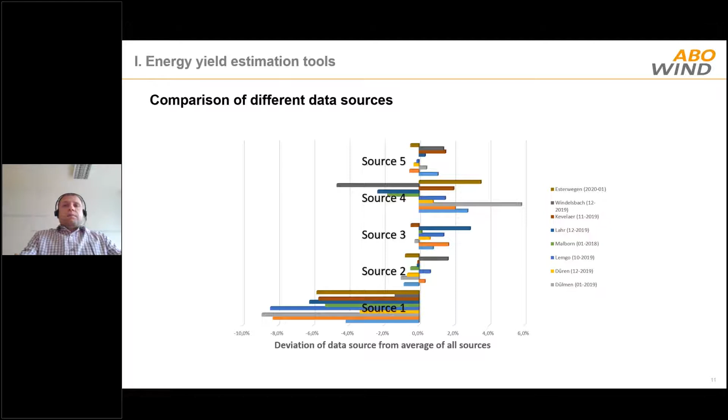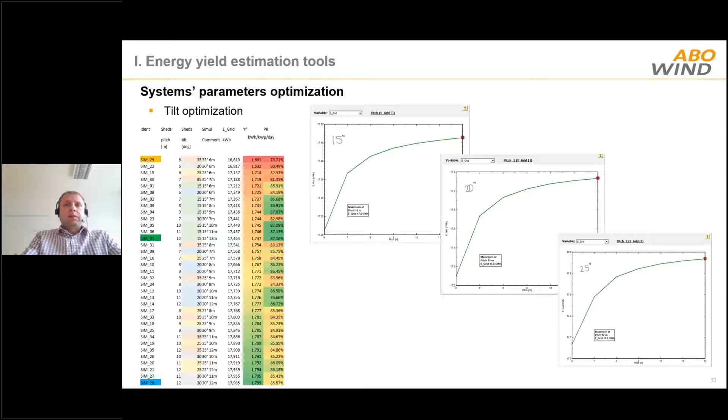The tilt optimization, of course, is the other factor, immediately going together with the optimization of the pitch. Nowadays, it is a really convenient and suitable way to run multiple simulations to get the optimum parameters for these criteria.

A comparison of different orientations and also module technologies is shown in the table here. Of course, depending on the location of the site, it is always worth evaluating the best orientation of the system. Nowadays, with the support of the software, it is a really quick process, but again requiring an experienced person running the software simulations; otherwise it would take much more time to get a better understanding about the optimum

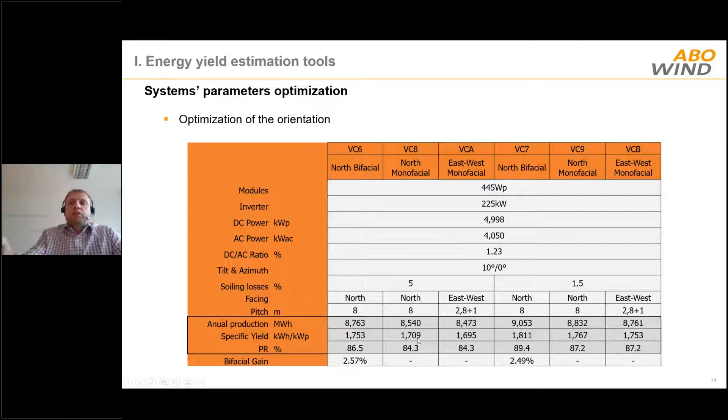yield. Of course, in recent years, bifacial modules are becoming more and more widespread on the market. So assessment of the bifacial gain compared to the traditional monofacial estimation is also part of the optimization that we perform when deciding whether to go ahead with a project or not.

Another important parameter that is part of the system assessment and parameter optimization is the DC-AC ratio. Here, of course, you can see different variants of the DC-AC ratio for the same project and how it affects the total yield and the performance ratio of the system. This helps us make a decision on the best DC-AC ratio, but also, working together with finance, to define the cost for obtaining the best DC-AC ratio compared to the expected yield.

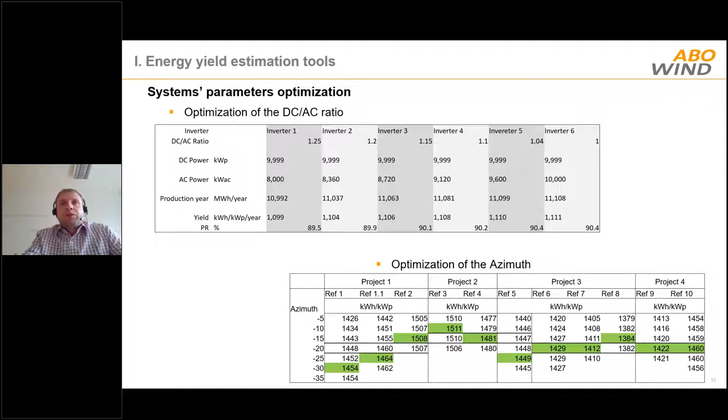Again, depending on the system location and the near shading objects, there could also be optimization of the azimuth required. In the example here, you can see 4 different projects where we ran optimization of the azimuth, and the results at first look could be a bit surprising, but it really shows how 4 different projects in relatively close locations can have a different optimum azimuth exactly because of the near shading objects. And this is a very important step for us because we are always targeting to get the maximum from the system.

After the meteorological data, the next criterion, which is of key importance for the projects that we are developing, is of course the site conditions. On the next 2 slides, I will show you how it goes when evaluating the site conditions with respect to the topography. Depending on the racking system that is going to be used, the terrain slope limitations are defined. And by using a proper software tool, we can relatively easily and quickly define the exclusion zones, shown here in red color within the site boundaries.

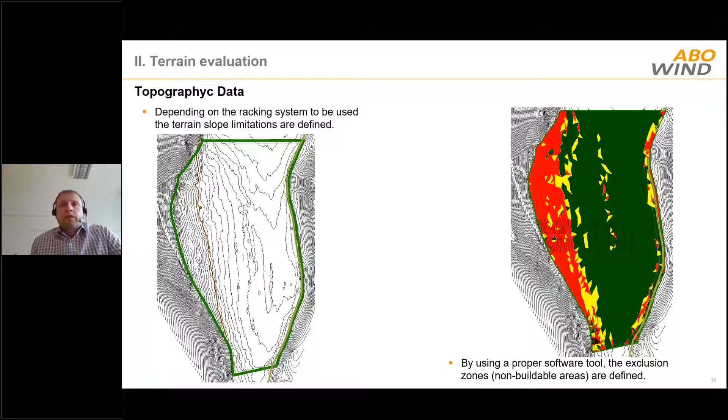After this, we are able to create a preliminary layout of the system, again identifying the exclusion zones, so we can easily understand how much power we can install on the current location, taking into consideration the zones of the terrain that are not proper for installation of PV systems.

layout. Here is a quick site impression for a relatively complex terrain, how it looks when built. Again, the same project. What is important to mention here is that the terrain is changing its elevation in all directions. But anyway, the fixed tilt system is following the topography of the terrain. And even in this project with the different slopes, which were higher than 10%, to overcome this problem we used 15 different table configurations, which is also important for the economics of the project, of course.

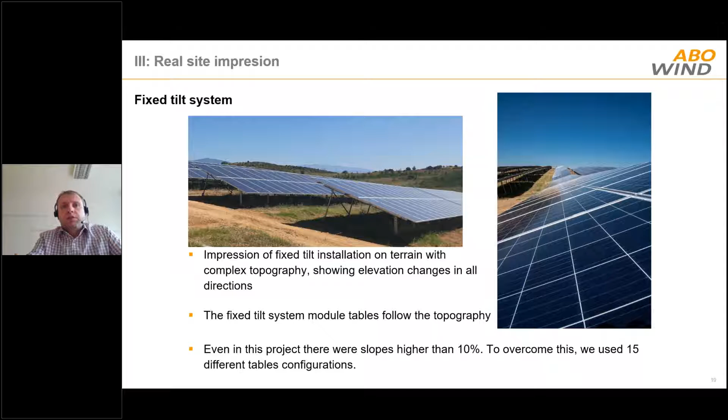Some brief and important conclusions out of this: I would say that using a proper software tool in combination with skilled and experienced people significantly increases the speed and the accuracy of the preliminary site assessment and design optimization. This gives us the opportunity to run multiple simulations in order to come to the solution that we consider optimum for our project.

The meteorological data that is used for the yield estimation is of course of crucial importance, as I was mentioning in the beginning, because wrong assumptions about this can kill a profitable project in the beginning, or vice versa, give a green light to a non-profitable one.

And of course, accurate topography is also of essential importance for the initial assessment of the project site. Again, for the same reasons, if improper topography or a wrong estimation is used, it can bring wrong conclusions, positive or negative, and of course, a negative output for the company itself.

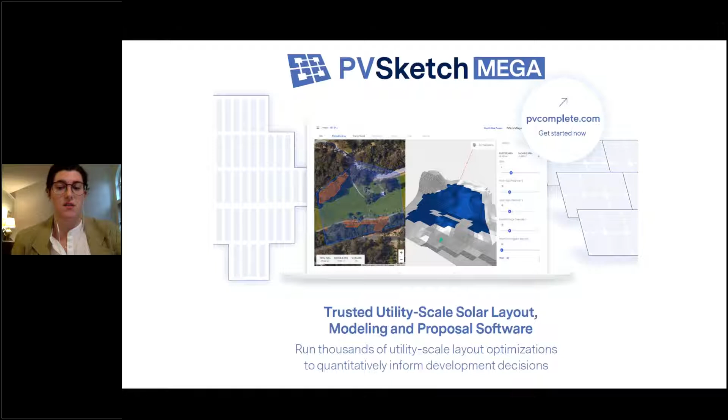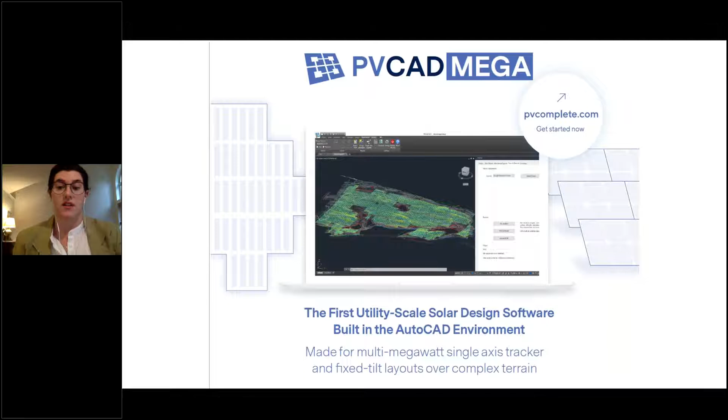PVComplete's Mega Suite includes 2 pieces of software: PVSketchMega, which is a web-based design tool for utility scale solar design optimization, as well as PVCAD-Mega, our CAD-based engineering tool for multi-megawatt layouts over complex terrain. This suite of tools additionally speak to each other, so you can move from initial web-based optimization to CAD-based engineering and layout seamlessly. The digital approaches I'll be covering, as well as many of the considerations that Miroslav discussed, are reflected in both PVSketchMega and PVCAD-Mega.

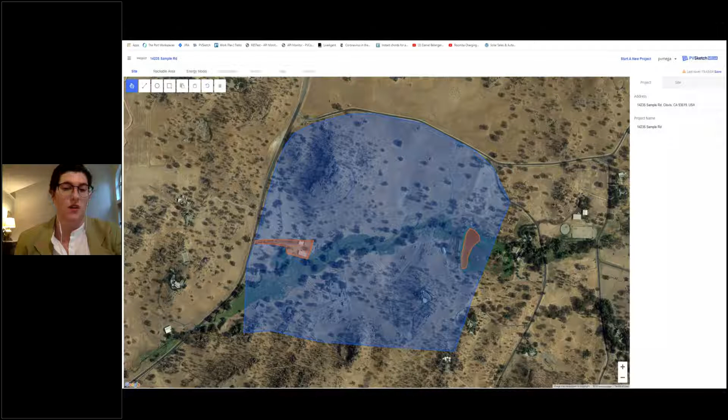So let's take a look at what some of these digital approaches are. Today we'll be considering a specific site. This is 14235 Sample Road. It's a large field with some typical tree lines, roads, and obstructions, and for reference, the site has a rough capacity of 40 megawatts.

So first, site prospecting. Before we even think about equipment or configuration, the first consideration is the site itself. Today, there are so many options for accessing digital topography data, and assessing the site considering general slope tolerances allows early assessment of a site's viability remotely.

Here at Sample Road, we've imported a site image and topography to calculate what we call the rackability, or the percent of usable space based on slope tolerances and other keep out areas. Similar to Miro's example of terrain evaluation and exclusion zones, you can see here in PVSketchMega the 3D profile of the topography, as well as the corresponding keep out areas based on our specified tolerances. So this site specifically has about 516,100 square meters of usable space, which is 72% of the total plot.

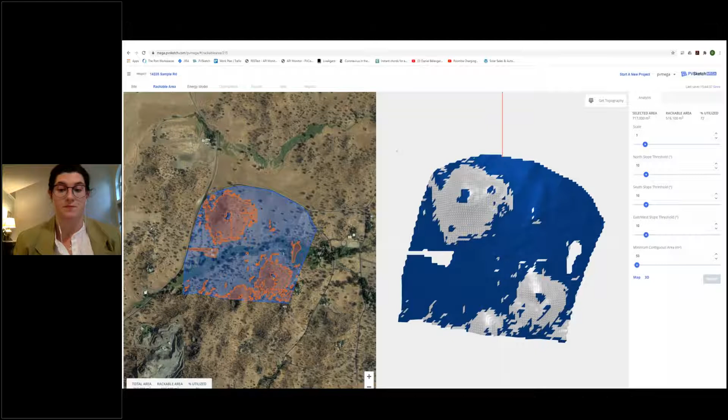We can also evaluate equipment selection, specifically mounting systems, so for both fixed tilt and single axis trackers. With the ability to automate layouts in lightning speed, featuring an unlimited number of different manufacturers, choosing a manufacturer based on which manufacturer and model requires the fewest number of piers or the least amount of steel is now possible. So as we all know, some trackers and fixed tilt systems are better suited to uneven terrain, and creating layouts comparing multiple manufacturers will ensure site economics are maximized.

Being able to design for and compare multiple mounting systems extends to both comparing different configurations as well as combining solutions within one design. So here at our sample road example, we have on the left our completed layout, and on the right we have specs, pretty small here, but listing things like system size, basic production values, number of trackers, for different iterations of the design, so we can easily compare basic project specs between projects that are using different racking systems.

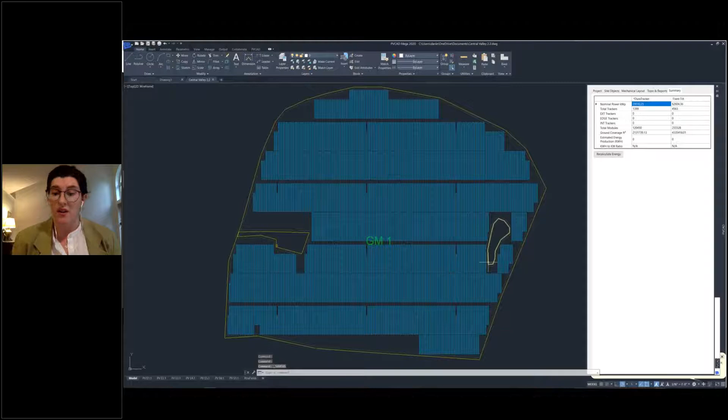As Miroslav mentioned, in some instances, different table sizes need to be used together to maximize your site. So with easy configuration and these lightning speed layouts, we can automatically place tables and trackers and consider different mounting options on one design. This is now more feasible and allows for a better solution that's tailored to the site across the board, both in system capacity as well as project costs.

And so speaking of project costs, material costs, this is one of the biggest considerations for project economics. Software solutions can now extend past slope analysis into pier analysis, and this is what our tool does as well. Rather than simply consider a general slope tolerance for trackers, we can now evaluate every single pier. So with automatic pier placement and analysis, every post can be plotted and sized to the requirements of its unique site location and its underlying terrain. So this results in better estimates, less steel, and lower material costs than projects for which all piers are manufactured at a uniform height. The more varied the terrain you're working on, the more impactful this upfront analysis will be.

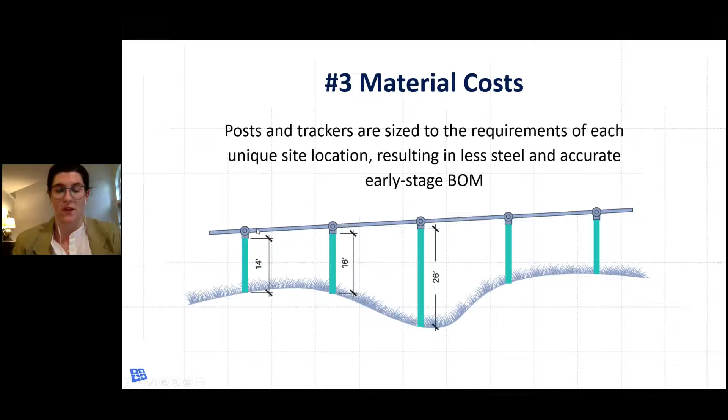So in this example here, we actually have an automated pier schedule for a sample road from PVCAD Mega. So this calls out each unique pier. And this highlighted column here is the calculated height for every single pier. So basically the sum of that column is all of the out of ground steel you need for your entire project. And so it's specific to the topography and the array configuration. And so this digital approach is also a data-rich approach, which is why it's so impactful when assessing project economics.

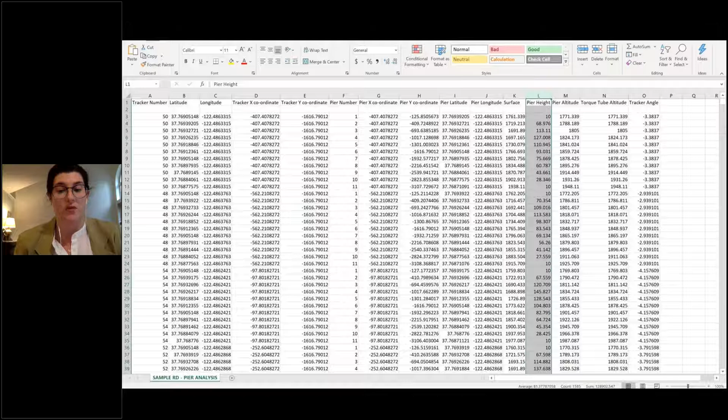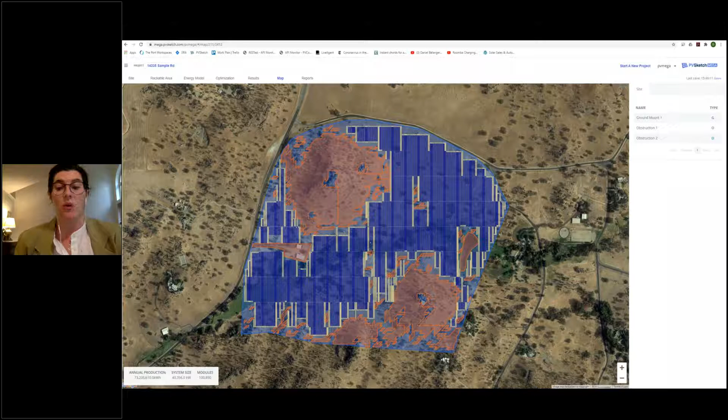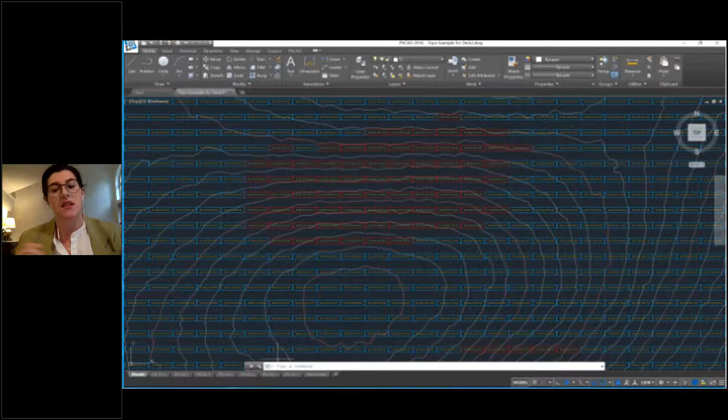Additionally, we can see in PVCAD Mega our site layout with analyzed contour lines and affected tables highlighted. In this iteration, we're looking at a fixed tilt system. With this information, you can compute the number of piers that are affected. We can also run pier analysis with adjusted tolerances to assess possible routes to mitigate grading. By identifying problem areas and then considering the piers and tables or trackers affected, differences in costs can easily be computed for a more informed plan forward.

Some solar design software platforms make it easy to determine how modifying key system components affect system design and performance estimates. As Miroslav also noted, these key components include modules, various tilt angles, DC to AC ratios, and orientation. We can assess these effects by computing ground coverage ratio, kilowatt output, and capacity and production values. Using software to compute these values is fairly common at this point, but often these calculations are being run in separate and independent tools and requiring a lot of input time and cross-referencing. And so nowadays digital solutions are beginning to evolve to actually provide one-stop shops for these key performance indicators.

In this instance, and this is an example of this, we can select and control project components in real time to see how they affect those key indicators of system performance. In this instance, estimated production.

And again, building on Miroslav's note on comparing multiple data sources, we can actually compare outputs from different production calculators. Across our Mega suite, we reference PVWatts, PVsyst, and Canadian Solar's CASSYS model. So these can all be referenced directly from our application. And here in the top left, we can see that in this instance, we selected PVWatts. And we further defined various modules, inverters, and system losses to assess how they impact that production model as well.

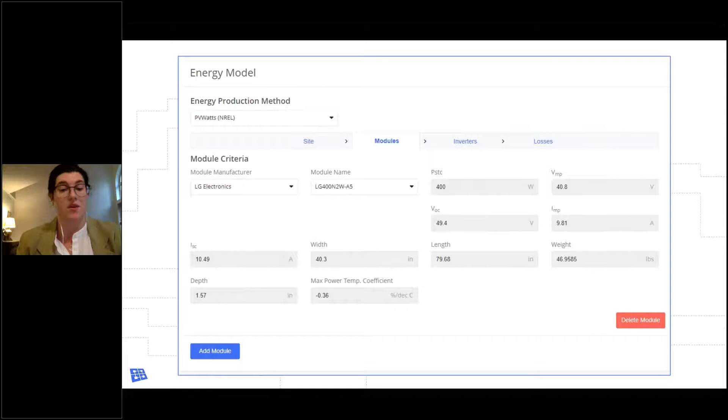Further down the project life cycle is construction. So with automated pier analysis, every post is sized to spec. This eliminates pier height-related slowdowns during project construction, such as on-site adjustments or costly unanticipated grading or custom foundation rework if crews encounter on-site terrain that makes it impossible to install posts within required range as expected.

The added accuracy of pier analysis versus traditional slope analysis ensures an elimination of false positives that affect on-site construction, as well as false negatives that cause lost capacity to your initial design.

Additionally, we're seeing more and more 3D renderings of solar designs these days, and the ability to view the elevated project in a 3D profile provides context to crews before even breaking ground, so there's no costly surprises once at the site. In PVCAD Mega here, we can see the 3D profile, and it's harder to see in this small image, but it's all the little yellow in there.

We've placed every single pier on this sample design with unique pier heights, and it's applied to every single pier. So as we saw earlier with the pier schedule, all of these heights are actually recorded for easy reference and use as well.

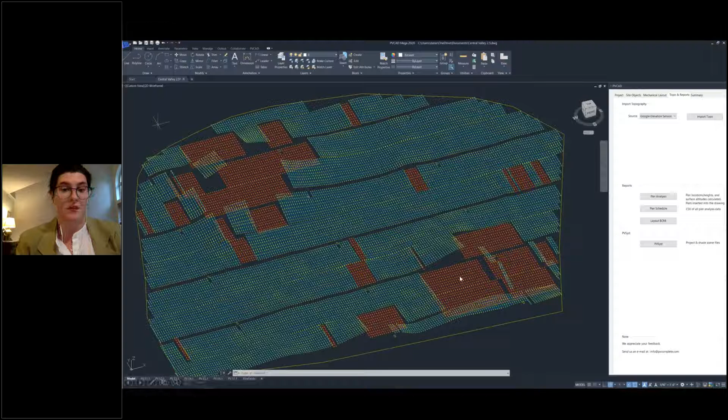And the last point I want to wrap up with is discussing optimization. So much of what we've discussed so far is some form of optimization. New automated software can take us even further down this road by doing the heavy lifting for us. Instead of manually recording and comparing all the outputs for separate production calculations and layout tools, software can now consolidate all of this information in one place, so we can succinctly run and compare all possible iterations in one place.

So in conclusion, we are now in a time where we can leverage digital approaches for site prospecting, mounting system selections, material costs, grading, system GCR, kilowatt and kilowatt hour, constructability, and optimization. As solar projects become larger and installed in increasingly varied terrain, these approaches are necessary to realize return and maximize project economics in an increasingly competitive and growing industry. The world of solar software is still young, and so we are all looking forward to the innovation that will continue to help us push solar across the solar industry.